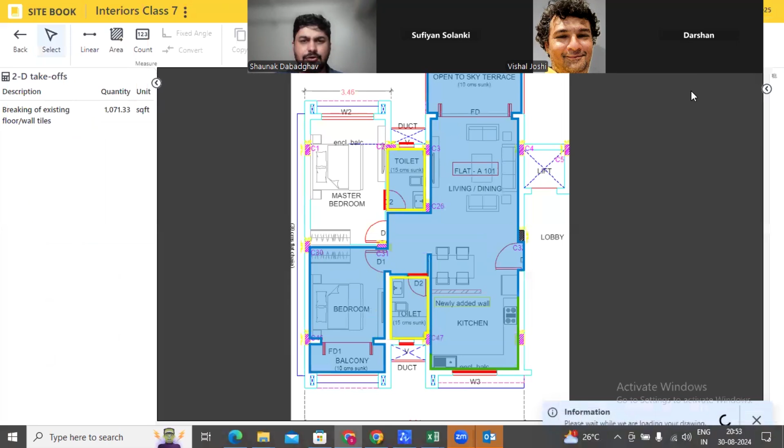This is a 2 BHK project. Just ignore these tracings for now. The area is 691 square feet total. We have an entrance here. This is a living room on the right hand side, and then you have a terrace, an attached terrace here. From here we have a kitchen, and this is a newly added wall, just for an example, so that I can take masonry and plaster as an example.

So if somebody asks what's in civil work, this is your one item: masonry, breaking, disposal, and you have the plaster and gypsum for this.

Now, I have one toilet which is here, like a common toilet, and then one bedroom with an attached balcony here. If I go out, this is a second master bedroom with an attached toilet. So this is the overall plan I have. I hope the plan is clear to everyone. Simple.

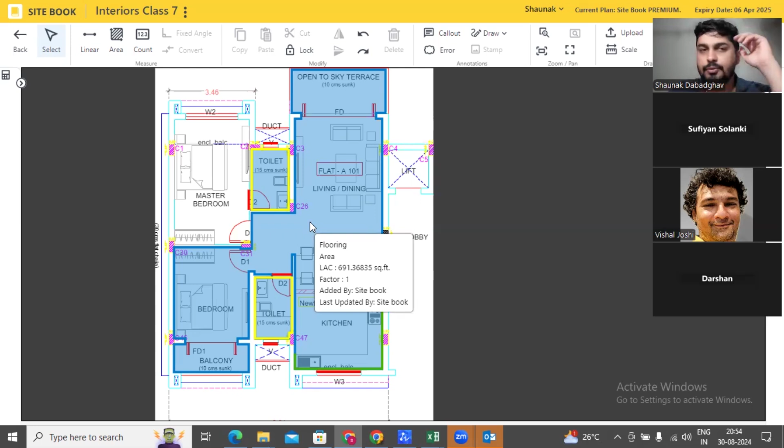Now, my first item is breaking of existing floor and wall tiles. We are assuming it's a renovation job which we have to do. So existing tiles will be broken, we'll dispose it, and we'll be putting new tiles. The cost for that is 50 rupees per square feet.

If you remember the detailed estimate format, I have the work items here. It's written description, doesn't matter, but the format is the same. You can write anything here - description, work item, particulars, it doesn't matter. So these are all my work items. Then I have the quantities, the unit, the rate, profit markup. Because we are using a tech tool, they have this, and then you have the final cost here.

Now what's the cost of breaking existing floor wall tiles? The rate is 50 rupees per square feet. For quantity, you click here - I'm just teaching you how to access the project drawings. Whatever quantity you want to look at, you click there, and whatever is the blue colored portion, that particular flooring we have to break because we want to put new flooring. That's why.

Second, you have wall tiling. Here we have wall tiling. How do you calculate wall tiling? Does anybody not know how to calculate wall tiling or floor tiling? Yeah, right, Dado. But is there anybody who doesn't know? Is there anybody else who doesn't know how to calculate wall tiling? Okay fine, great, great. I'll explain it in depth then.

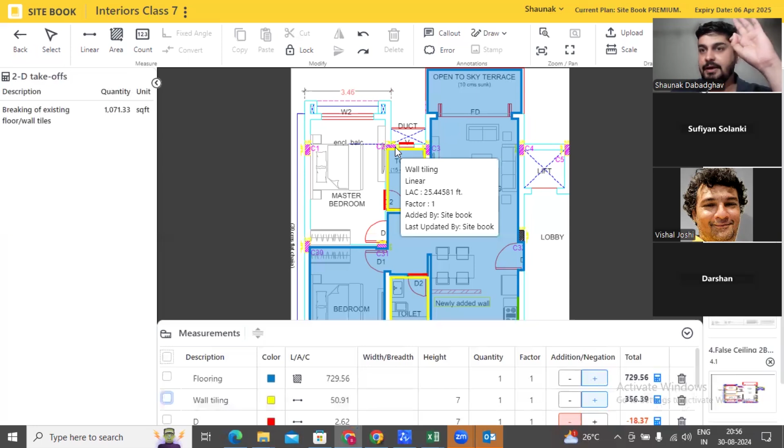See, what I'll do is - flooring, you know how to calculate, right? I am just not in the tool, I am just saying in general, in AutoCAD also - if you don't know, then tell me. Flooring is area. I have to know what is my length and what is my width. If I know these two measurements, I know what my area is going to be. That becomes my flooring.

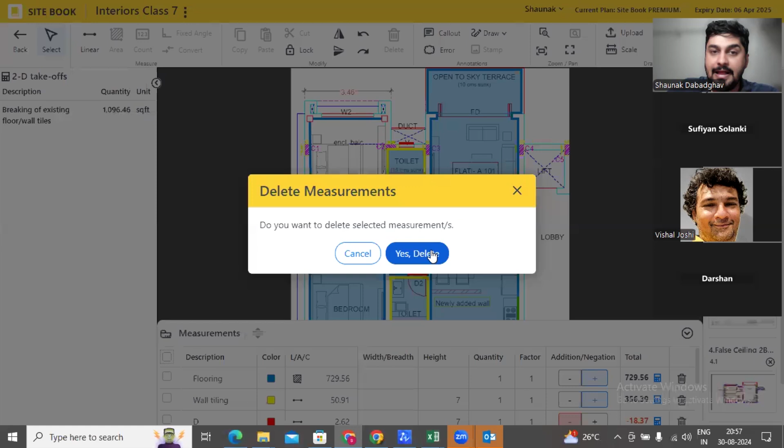इस टूल में जो भी आप CAD में काम करते हैं, same way आप यहाँ काम करेंगे। मैं area command use कर रहा हूँ। आप CAD में polyline command use कर सकते हैं, polyline और Excel जो भी है उसमें मैं calculate करूंगा। I hope everybody knows polyline command - PL enter, LI, you get the area.

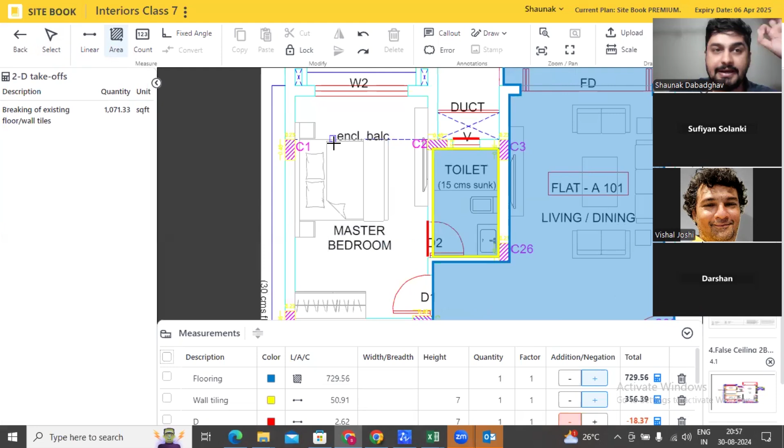अगर मुझे फ्लोरिंग निकालना है तो first thing I need is what is my width and second, what is my length। So 16 फुट बाय 10 फुट, around 160 square feet is the area.

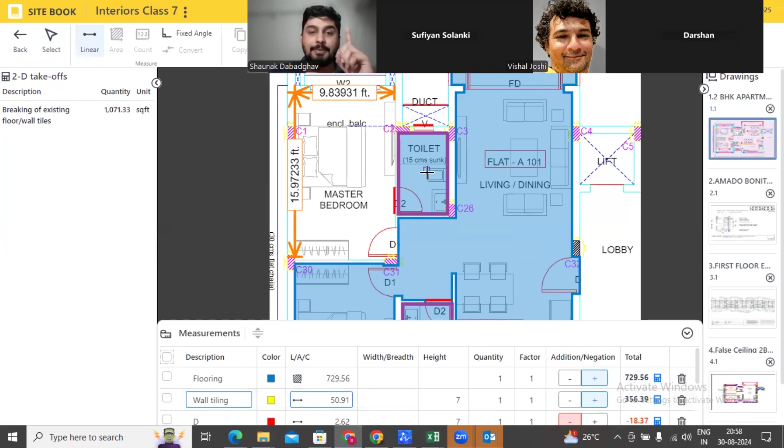Why is it 7 feet? Because generally false ceiling आता है मेरा वहां पे at 7 feet और door की height भी 7 feet रहती है, इसीलिए मैंने that height consider किया है। It could be 8 feet or whatever, depending on your project, where you are working, depending on that। 7.2 भी हो सकती है।

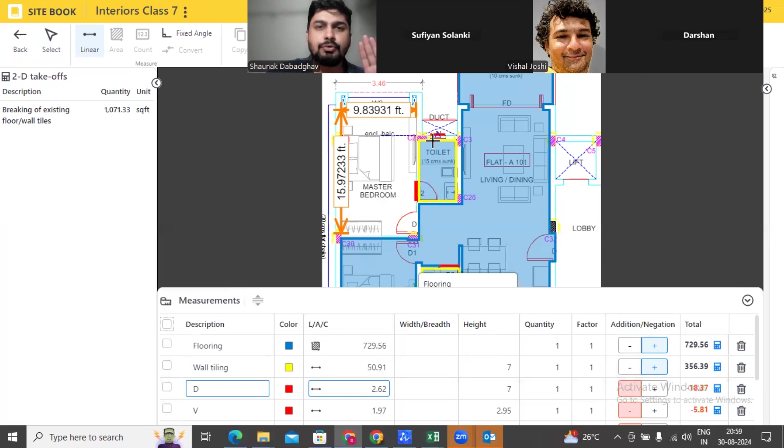Did you get an approximate idea on how to calculate a wall tile? If not, no problem - tomorrow in depth we are going to discuss wall tiles, so that time I will explain it again.

Others? Wastage percentage, we will discuss it while calculating tiling. Right now, for an item like breaking, no need of calculating wastage percentage. But while we are discussing tile, so tile we are going to take it tomorrow, so we'll discuss wastage percentage in depth at that time. Okay, so this is my one item.

तो iska cost I have 53,000। So this is my first item, so the total cost is 53,000।

Second item is disposal of debris। So I have done all the cutting and breaking, now I need to remove that from the site। So that disposal of debris - this is wrong, this 173 nahi hona chahiye। There's something wrong here, it has to be in numbers, in trips। So this is 2 - here we have mentioned number of trips as per actual if exceeds more than 2।

I will explain what I mean by this, but दो number of trip हमको लगने वाली है, that is around going to cost me around 2000 rupees per trip। Now what do I mean by this statement - number of trips as per actual if exceeds more than 2 is, let's assume now I have no idea कि breaking में कितना, how many trips I'm going to require। You cannot, it is very difficult to calculate something like that।

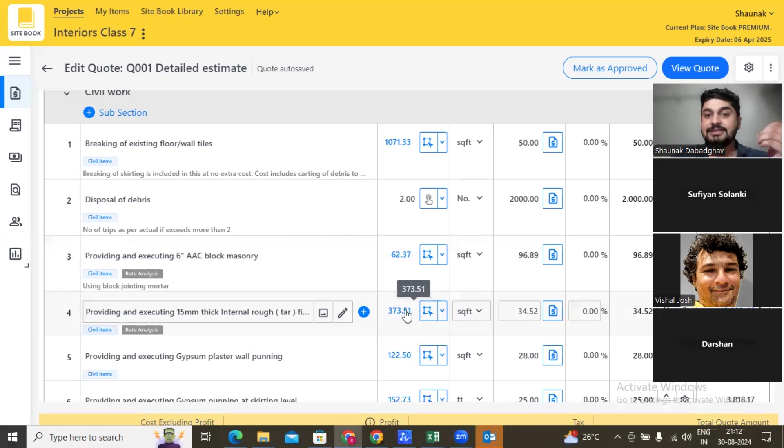And then I have my material quantities, which here if you look at Site Book, or I'll take a plaster example - if I click here, I have my material quantities: cement 6 bags, crushed sand 30 CFT, chicken mesh half roll. So this becomes your material quantity. And item quantity is what? This 373 square feet. I hope you understood the difference.

Now, for AAC block, I'm not going to go in depth of the rate analysis because it's available for you, so I expect you to have a look at it later on. Any rate analysis you want to refer to, just click on the dollar sign and you will find the rate analysis for that. Go to the Site Book library, lots of rate analysis, lots of costings you'll find. Explore it, it's amazing, there's a lot of things in that.

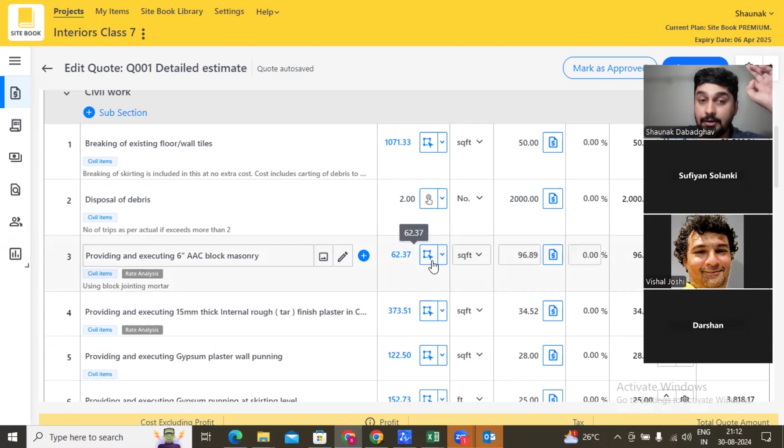Take advantage of it. Okay, now going to the item quantity of it. Yeah, they are updated on a regular basis. So now this is a simple item, right? Only one wall I had considered, so that one length I have taken.

Again, take distance in CAD, and 9.51 is the height. So what is my height? My height is my slab to slab height minus my slab thickness. So that we have considered here. Okay, so that is 9.51. A little bit here and there doesn't make a difference, you could consider it 10, that's also going to be fine, but it's better if you're accurate with your quantities. So 9.51 we have taken.

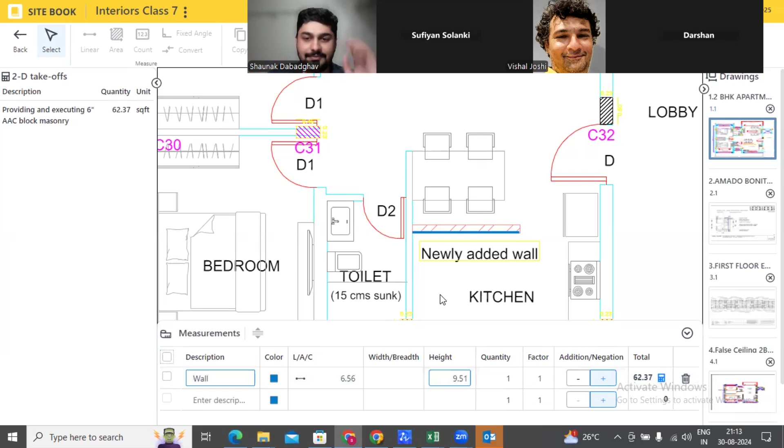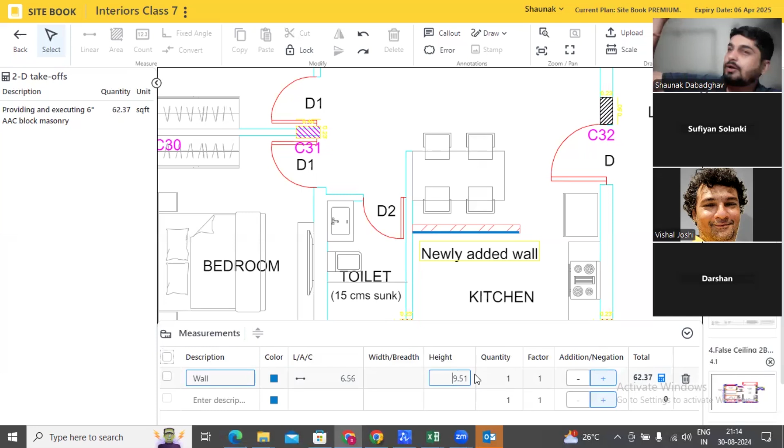Why did we take 9.51? I'll not go in depth right now, but if you want, I can tell you that a 150 mm slab is taken. 150 mm is 6 inches, 6 inches is half a feet, so from 10 feet we subtracted half a feet, giving 9.5. But again, 1 inch is 25.4 mm, so for that, the 0.4 was adjusted to make it 9.51. Don't go into that depth right now, it's not required - you just need to know what is your slab to slab bottom height, that's going to do.

So this is your AAC block masonry. Have you guys heard of long wall, short wall method? We'll take that tomorrow, but long wall, short wall method and center line method, have you heard about it?

I guess all the civil engineers know it, and probably interior designers might not know it, which is fine. I'll tell you tomorrow in depth what is long wall, short wall, and what is center line, and when they were practiced. We still do practice it actually, but you can't say it is foolproof.

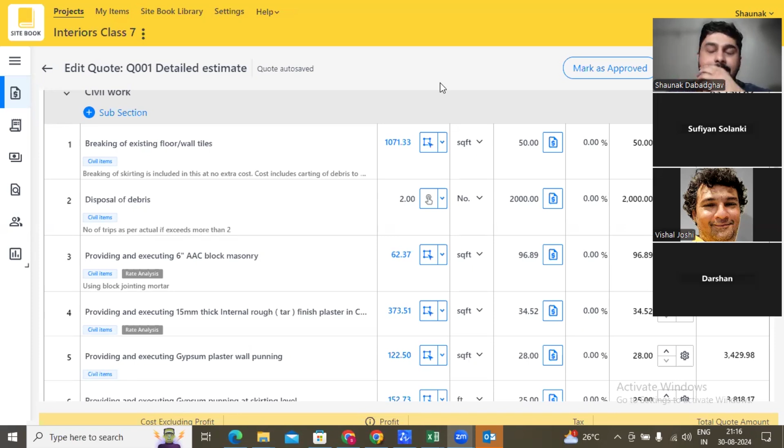Just click on it and click on the detailed estimate part, and then you can view this. When you go to edit, you have all the quantities and all the rates and everything.

So how to log in, I'll send you a video. Site Book comes in different modules, so I'll send the details. It starts from 550 rupees to 8,000 rupees. Different modules are there. Yeah, you can open it with Google Chrome as well.

What I'll suggest is check out the project and check out the Site Book library - it has amazing things. For example, if you want to see plumbing, internal toilet cost, you have the inside toilet and all the items that go into a toilet, and you have the reference pricing for it. So above counter basin, which one is 4,000, which one is 2,500 - you'll get all that in there. So you explore it, you have it. I'm not going to talk much about it, I'll send you a video.